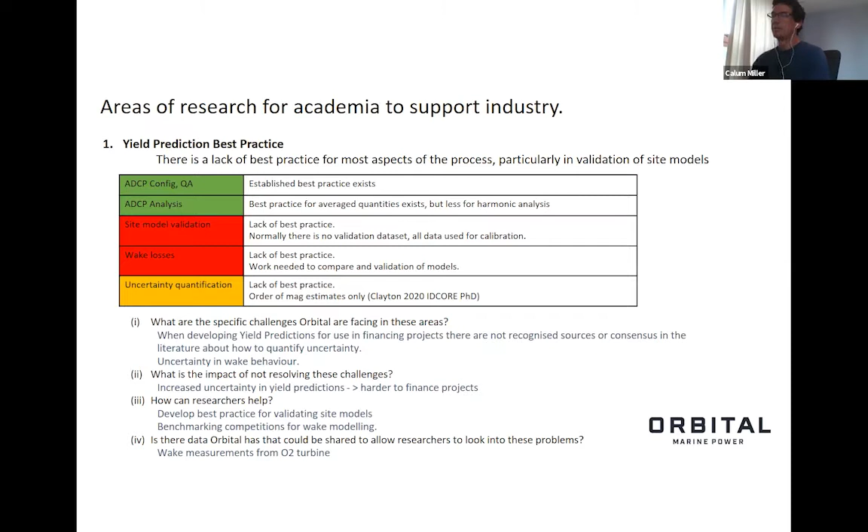And then these are the kind of questions that Danny posed to me at the bottom of the slide - how important an issue is that to you? I'm probably running over time, so maybe just skip over that. I think I got the point across there. So if we can go on to the next slide.

The next area of research is on turbulence characterization and how it flows through the load modeling process. I think Hammerfest have some similar slides on this in a bit more detail coming as well, so that's good to see that we're talking about the same thing.

Turbulence is a major driver for rotor loads and therefore loads in the entire system. But the current techniques we have for representing it in load calculations are quite simplistic, which leads to you either being conservative or taking too much technical risk. There's a lot of room for improvement there.

So the work that I saw was needed, and I know Hammerfest are going to build on this later, is first of all to characterize turbulence across the different commercial sites in a way that's both comparable and can be used in load calculations. There is literature available for different pieces of turbulence analysis done at different sites, but the metrics and analysis techniques used are not always the same, so it's not easy to compare one site to another.

And the metrics that are produced are usually not ones that can be directly used in the load calculation process - you can't just stick them into a BEM solver like Tidal Bladed or Fast or something like that. So the information ends up being something you can't really use as a designer.

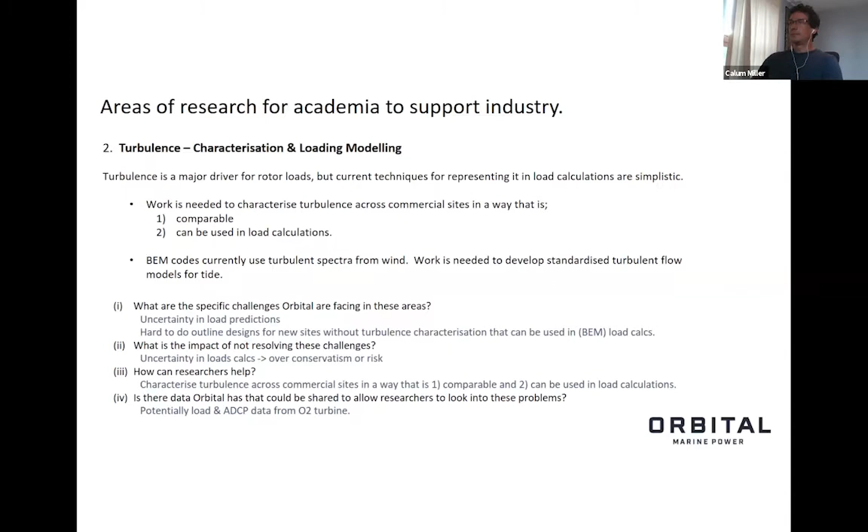Blockage effects. Most turbines to date have been deployed in reasonably deep water, so usually the rotor takes up a good bit less than 50% of the water depth. For us, the SR2000 was at 30-36%, and the O2 is at 44%. But that's because EMEC's a reasonably deep site.

Most commercial sites are actually a bit shallower than that, around 35 meters, many of them anyway. At the same time, we want to put bigger rotors in that shallower water, so we're going to be occupying up to 70% of the water column in the not too distant future, all going to plan.

We know this will change the hydrodynamics over the rotors. We know it will increase the loads and increase the energy capture, so probably a net benefit in that we'll capture more energy compared to how much the loads increase. But we don't currently have effective tools for modeling this and doing the design calculations because the BEM codes don't deal with blockage.

It's not entirely clear what the best way to model this is and do the calculation. So there's some fairly fundamental hydrodynamics that needs to be worked through in terms of how to model them. Can we just augment BEM codes? Do we need to use horrendously time-consuming CFD? Or are there other analytical techniques that can be applied?

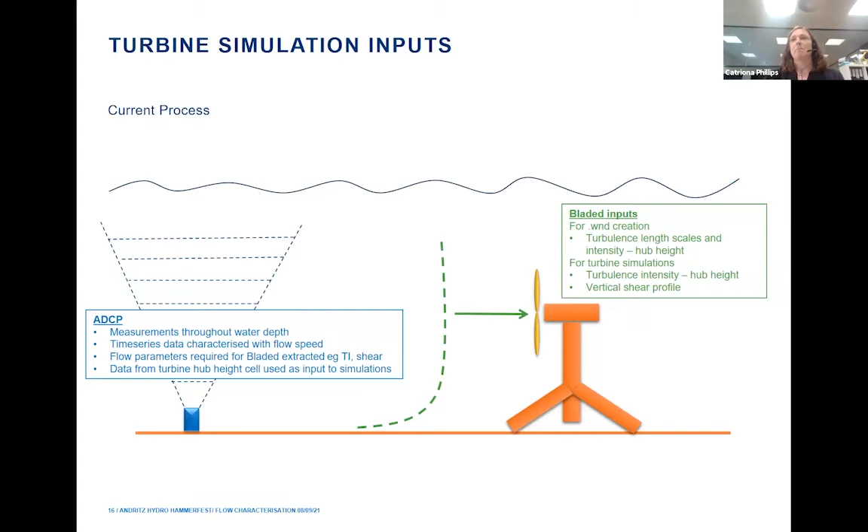And as Calum pointed out before, the models used to recreate the turbulence field are based on wind spectrums and wind models, which are probably not ideal, and Calum noted that it was a topic for consideration. So these 3D turbulence files recreated from our ADCP data are then applied to the simulations, and within the simulations themselves, turbulence intensity is specified depending on the flow speed, and on top of that a vertical shear profile is included within the Bladed software.

Generally we run 10-minute simulations where the hub height flow speed is a constant mean. So we have to do a number of different simulations at different mean hub height flow speeds with different turbulence characteristics and different vertical shears.

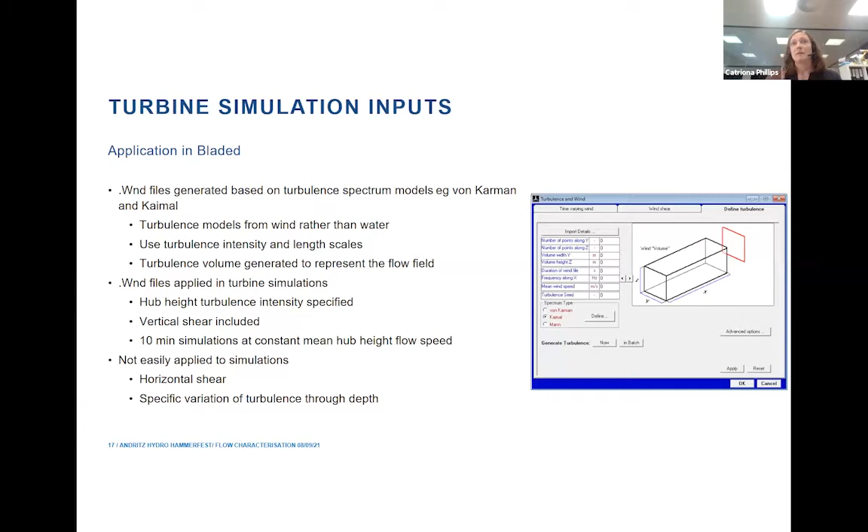Next slide, please. So summarizing for this particular area in terms of turbulence modeling within our simulations, our thought is, because the models just now are based on wind and we don't have anything directly applicable to tidal flows in terms of extrapolating the turbulence intensities to the full flow field...

We're kind of thinking that if you could take, for instance, the ADCP data directly and somehow generate this 3D turbulence field that can then be fed straight into the simulations, without having to first compress the data and then expand it again within the Bladed environment, we think that would be beneficial.

Also, you could then include whichever turbulence variation through the depth that is there at the site, and vertical shear would already be included in the data and wouldn't have to be applied separately. And it would give the ability to include other parameters such as this horizontal shear, if we think it's there, or if we think it's necessary to include, if we think it's going to make a difference to the loading of the turbine.

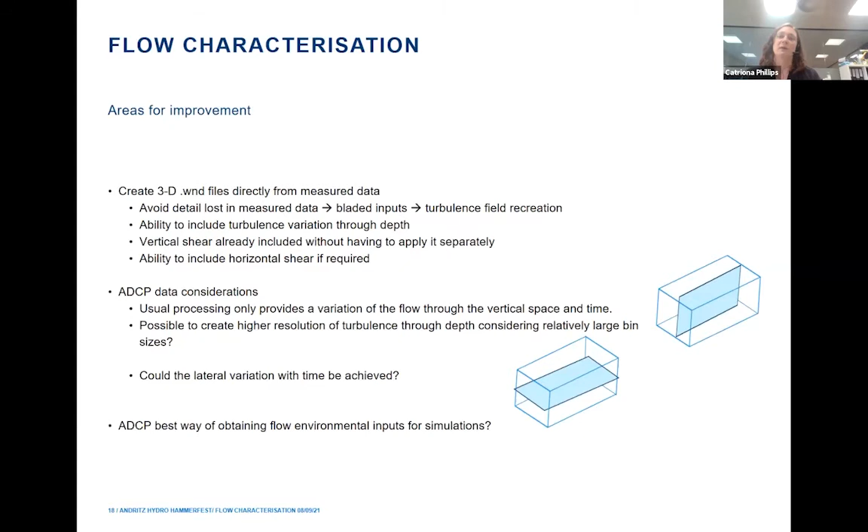And then just as a point for consideration to finish on - are our ADCP measurements actually the best way of obtaining the environmental inputs that we require for the simulations? Would there be any other instrumentation, or perhaps detailed CFD models, whether 3D, that would be suitable in order to get this sort of 3D section of turbulence...

That we could then just feed straight into our turbine simulations without messing about too much with the parameters and recreating turbulence fields from data where we would probably already have the turbulence fields initially before compressing it all.

So it's just a few more detailed points to consider in terms of the flow characterization for modeling the turbines, in order to try and reduce any conservativeness and reduce costs and improve the process basically, and make things easier to run and make my job slightly easier. But that's kind of all for now.

Thank you. Okay, thanks very much indeed, Catriona. We're definitely here to try and make your job easier.

Plenty of food for thought, not only in your presentation slides, but the narrative that you put on top of that. So I hope we're capturing some of that as we go along. I'm getting nods, so we are.

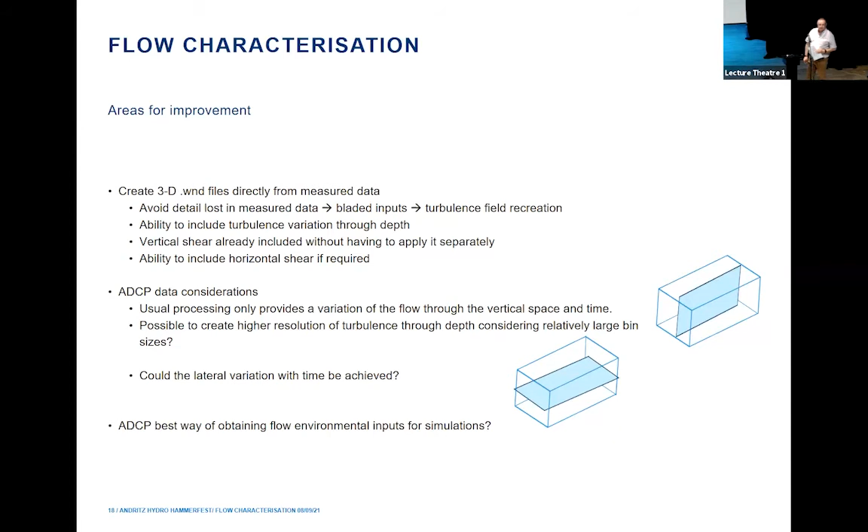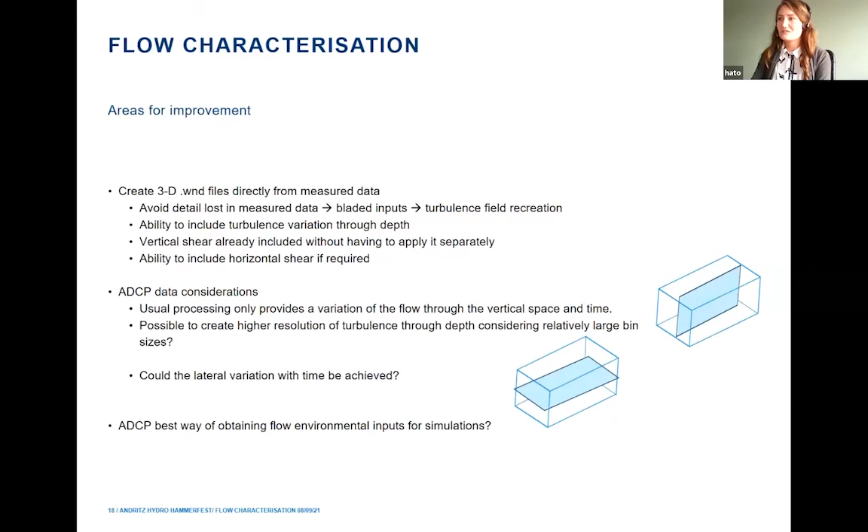If we can move on to my slides, please. Is my video showing? Sorry, I've tried to turn it on there. Let's see. Slides, Hannah. But if there's an embedded video, that's not running. No, I mean just my video of me, but you don't really need to see me, but I have tried to turn it on. We can hear your voice, that's the main thing. Okay.

Conscious of the time. So it's Hannah Torrance-Spence, work at Minesto. I work in the site development team and work in resource assessment. I've been at Minesto about 3 years. David Collier's name is also listed on my title slide. David has helped me put together some of the questions, and David is the COO at Minesto.

One of the research themes that we feel would merit further collaborative research is quite high level, generally on furthering understanding of the real extractable tidal stream, and also for us ocean current energy resource on a global scale. Furthering understanding of the total global extractable resource will require studies on global, regional and site-specific level.

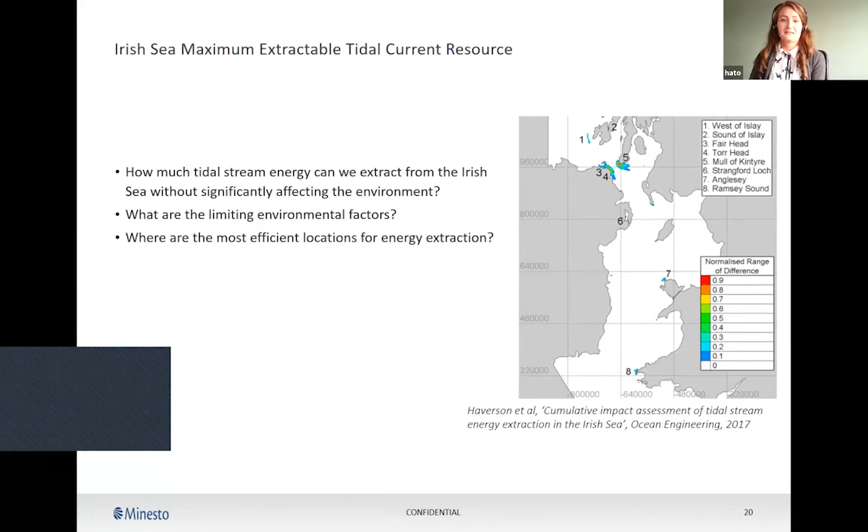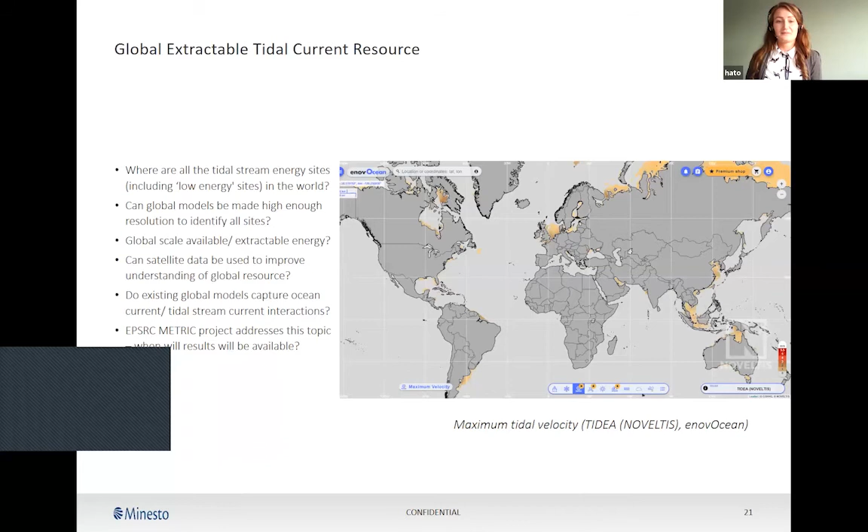We know there are a couple of studies looking at energy extraction from ocean currents. There's a very interesting one we've read from Renewable University, looking at inserting arrays into quite a few microsites in the western boundary currents, and seeing some interesting effects from energy extraction - shifting currents offshore, wake effects, reduction of flow speeds from one array affecting an array 100 kilometers downstream. So this warrants a lot further investigation.

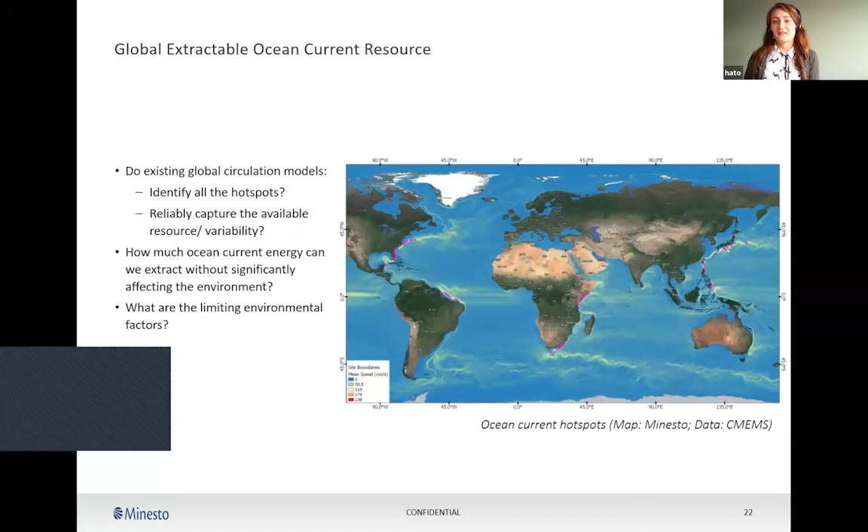Next slide, please - I think that's my final slide. Just to say thank you, and to get in touch if you have any feedback on these topics.

In terms of opportunities for collaboration, we're interested in developing project proposals. As developers we can share our site screening criteria and turbine siting constraints, share site data, and even work together on the analysis and interpretation of results from these sorts of studies. We're very interested to hear from you if you're interested in the topic.

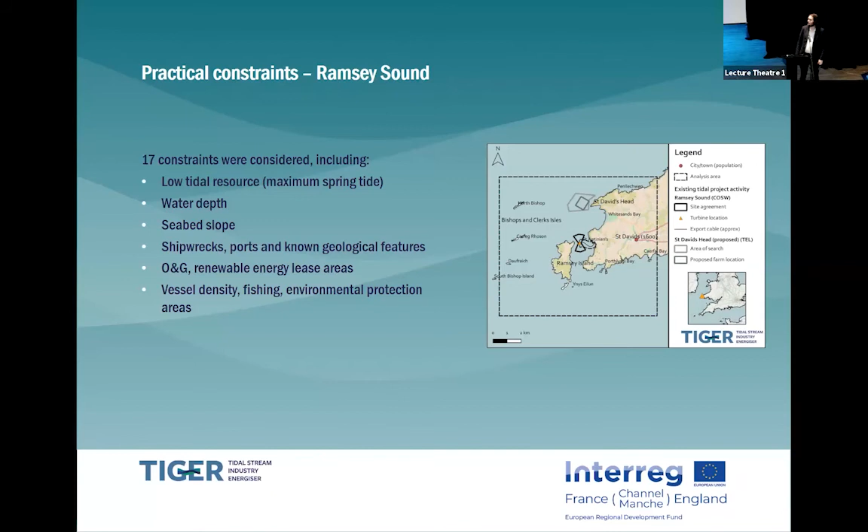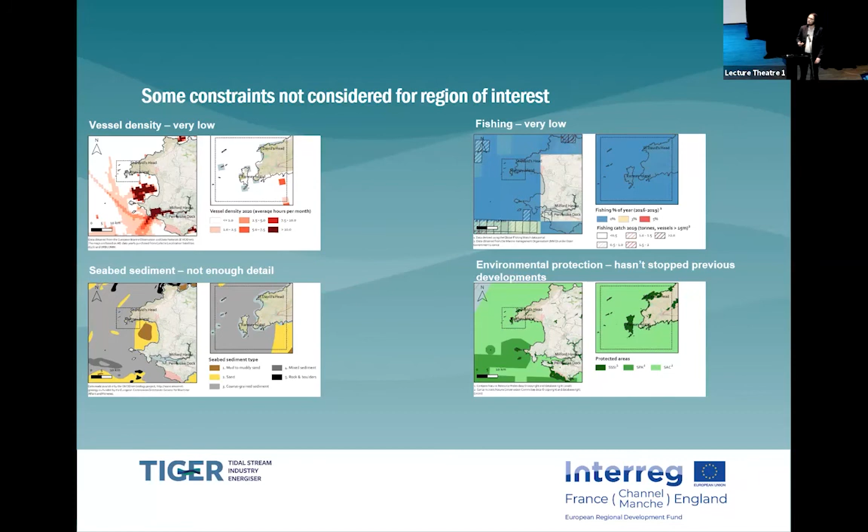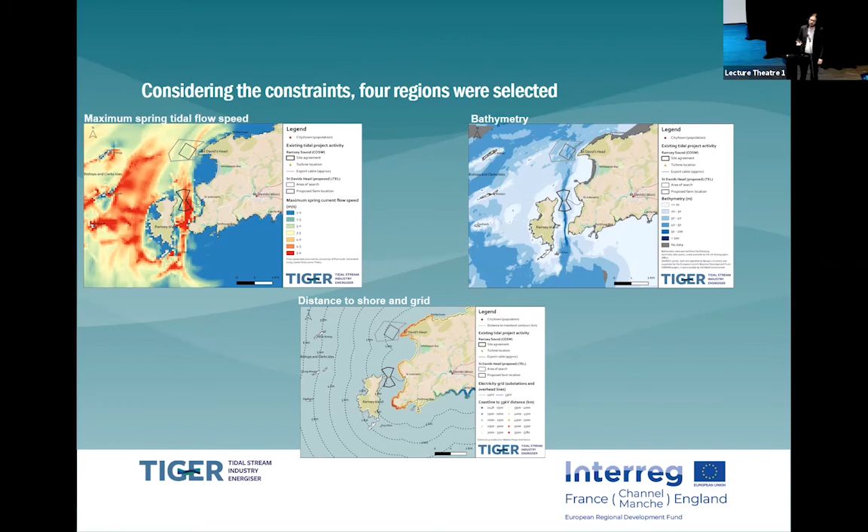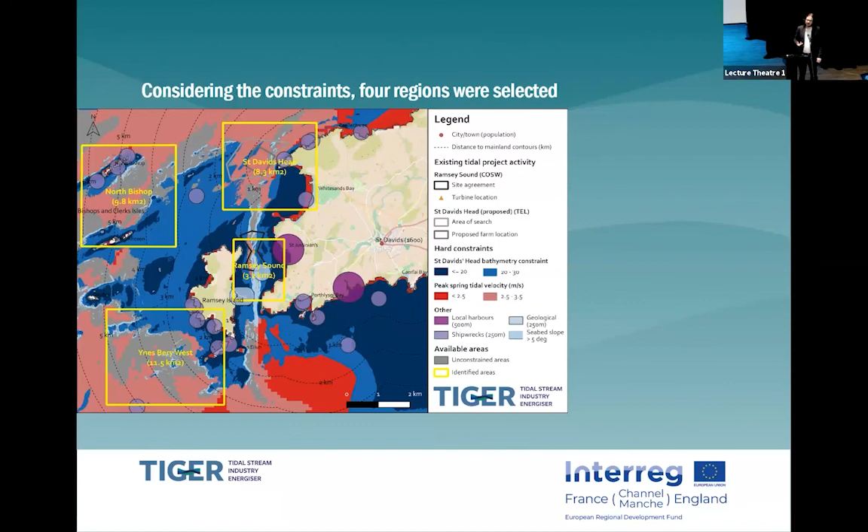This is the next stage really. The next stage is we're going to look at a techno-economic levelized cost of energy analysis to then say, within these 4 areas, is it economically viable? So this is really the kind of technical feasibility study we've done at the moment. We plan to do this analysis for all of the TIGER sites, and this understanding will really help the industry move forward and help us understand, in these areas where there's a lot of interesting research going on, what's the size of the prize? Yeah, thanks a lot for listening, I'll take any questions.

This is the bit where I step in, I'll move to the side and encourage the audience to ask questions. Okay, thanks for a great presentation, and great, we've got a question up there. I've just got a little joke to get in.

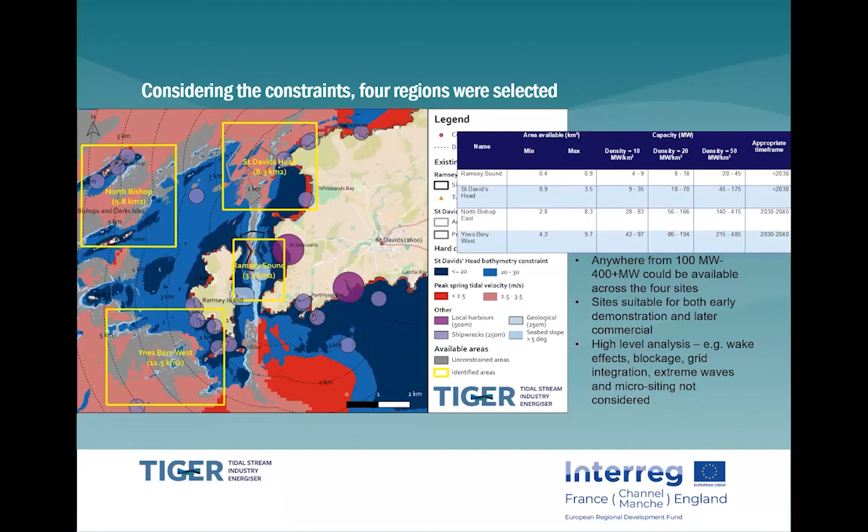And yeah, we'd have to assess the sites, but a lot of the sites, like anything in the English Channel, that's pretty exposed anyway. And the Pentland Firth itself is still massively exposed. A lot of waves get funneled in there from the Atlantic and the North Sea, and all these sites are definitely valuable from both the survivability and the yield point of view. So I wouldn't be scared or pessimistic looking at these sites when the time comes. Yeah, that's great. Thank you.

Just a quick question from me. I guess from my experience, one of the issues has been that in the past, when setting these types of constraints, they're set rather arbitrarily without too much information from specific developers or turbines. So even with small changes in, for example, the maximum flow speed or whatever you're using, you'll see a very different map. So a question again for the developers, similar to what's already been asked with waves: if there is any information that could be provided in order to update these maps for specific devices, that would be really useful in order to establish which turbines are suitable for which sites and which ones are going to be economically viable. Maybe not a question for straight away, but if you're open to sharing that sort of information, that's something that I think would be really helpful.

Yeah, I'll touch on it quickly from our perspective. So we did send out questionnaires to all of our partners asking for these constraints, so we do have such data. We'd have to obviously ask if we could share that because there is confidential stuff in there. And I think part of the reason why you see, in the table, I've taken different densities.

There's that min and max area available as well. So I did consider sensitivities to try and get a feel for an upper and lower bound. But I appreciate that it is fairly coarse and it does change quite significantly with the assumptions. Based on this, in Ramsey Sound, it could be between 4 and 45 megawatts, which is a huge range. So I think there is more work to be done in this area.